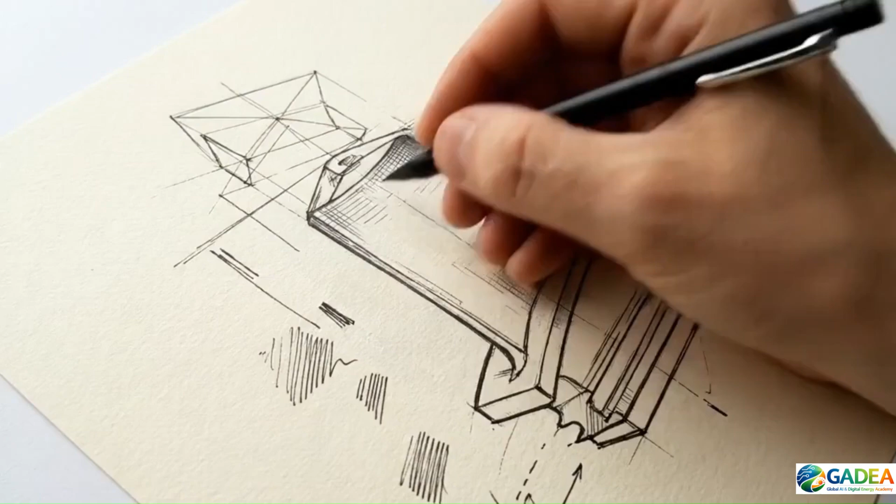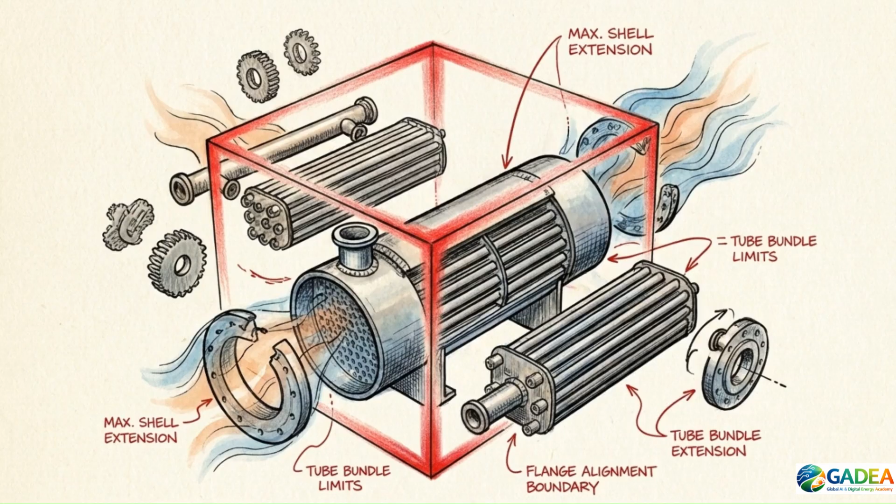Generating complex 3D geometry is no longer the hardest part of mechanical design. Today's tools make modeling almost effortless. The real friction in 2026 is ensuring that the geometry you just modeled actually complies with intersecting global regulations and surviving the multidisciplinary reviews required to prove it.

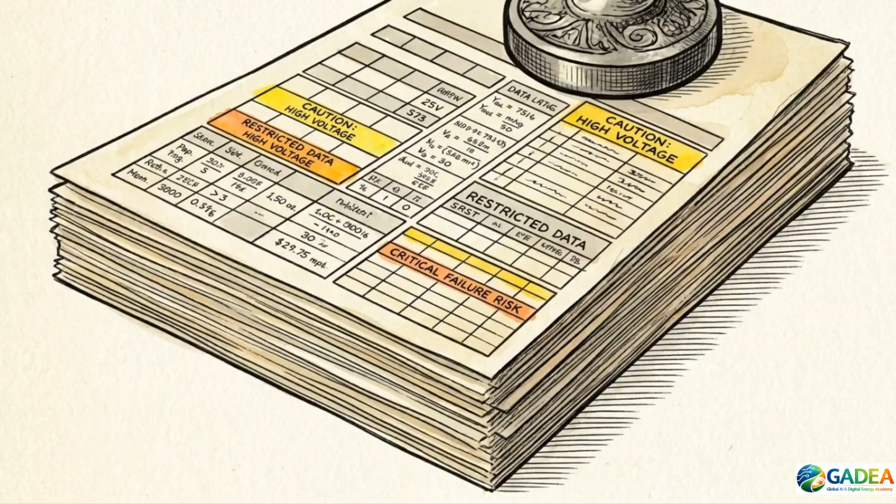For decades, the standard approach was to build parts in CAD and track the regulatory constraints separately in static spreadsheets. Looking at the flaw section, mapping codes with static documents leads to late-stage spatial clashes, when physical rework is most expensive. Modern PLM reconfigures this architecture.

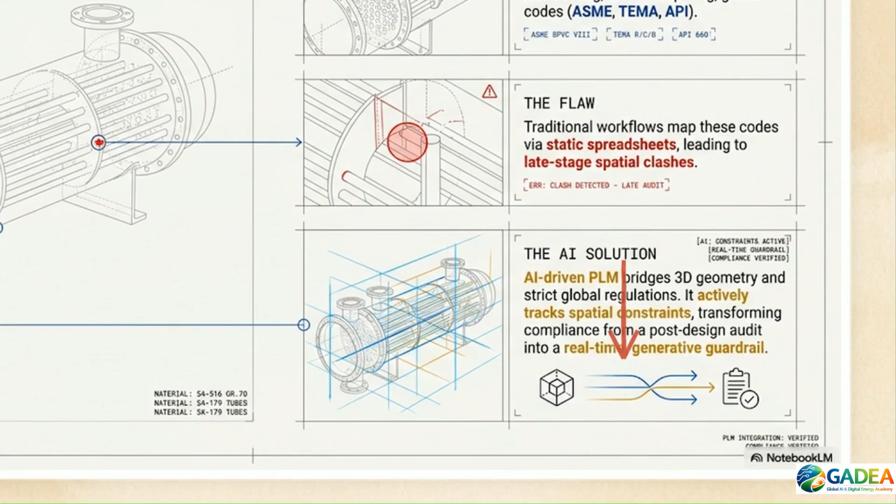By actively tracking spatial constraints, AI-driven PLMs convert a post-design audit into a generative guardrail. This leaves engineering teams with a crucial decision: do you pay the migration costs to adopt a heavy AI PLM, or do you piece together agile cloud tools and ultra-realistic renderers? Choosing a platform in 2026 requires a specific trade-off between rigid compliance guardrails and rapid iteration speed.

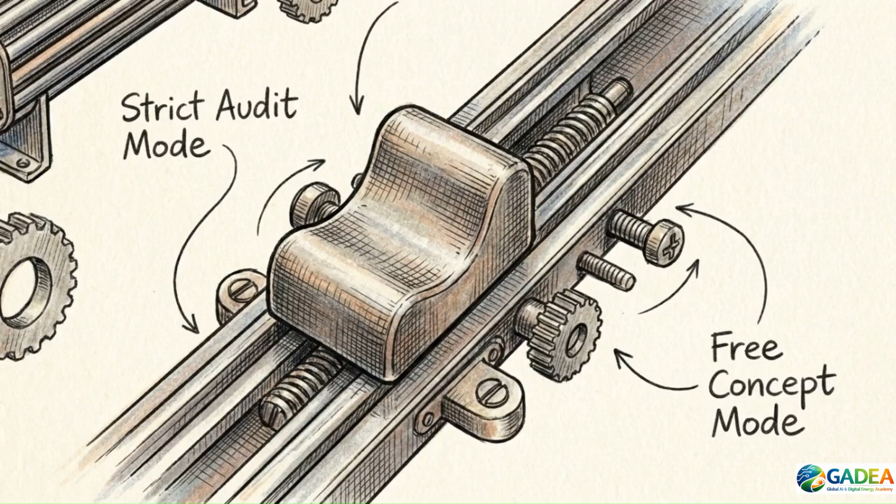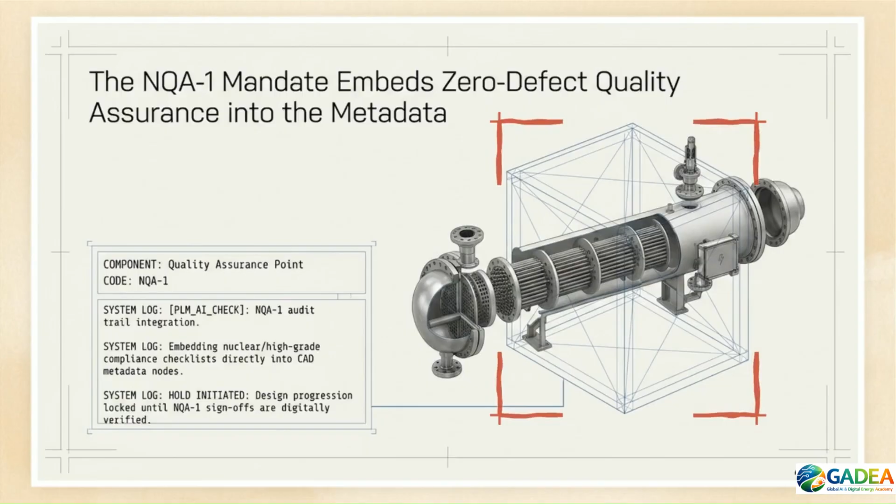Let's evaluate the Enterprise AI PLM tier first. This system serves as a generative guardrail for highly regulated fields. These systems handle specialized requirements by taking nuclear-grade checklists, like the NQA1 mandate shown in this bounding box, and embedding them into CAD metadata. Notice the hold initiated status. The system physically locks design progression until every NQA1 sign-off is digitally verified.

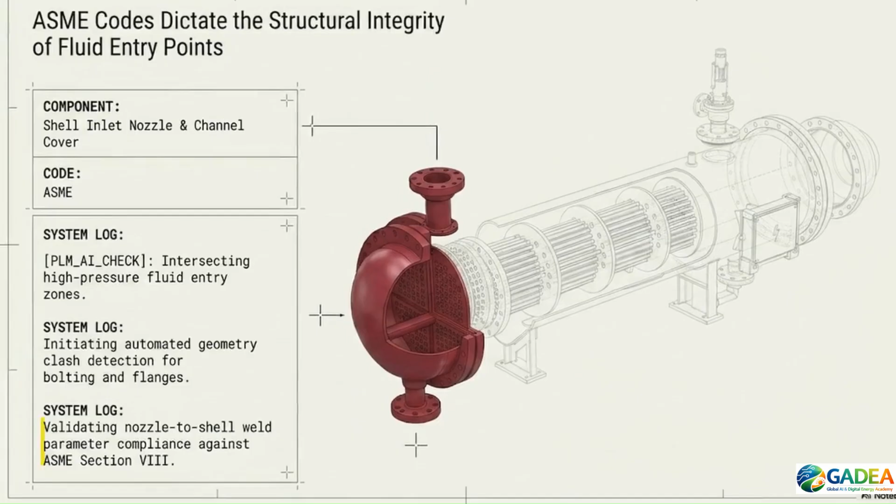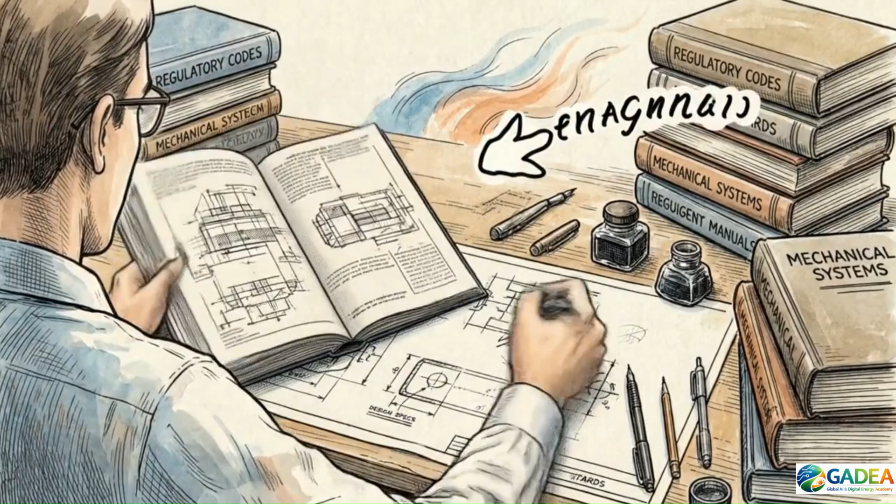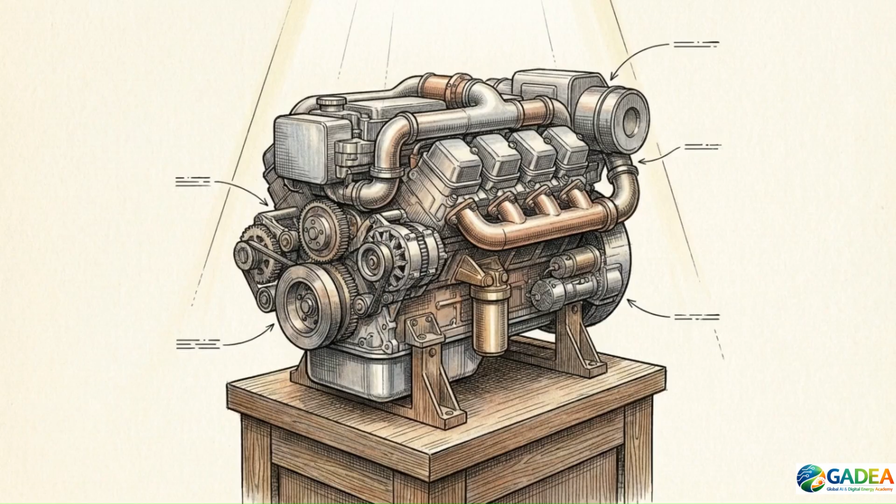Reaching this level of automation requires an upfront investment in metadata structuring and forces your team to adhere to a rigid workflow. Enterprise PLMs effectively eliminate late-stage physical rework. But if your team operates outside of heavy industrial design, the administrative overhead makes this system expensive overkill.

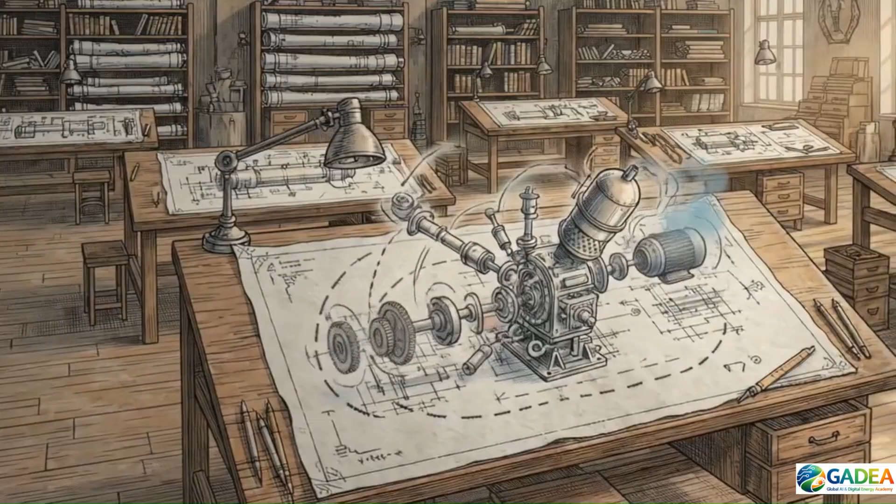If your priority is moving fast rather than locking down databases, you have to look at agile cloud platforms and desktop motion solvers. Desktop solvers approach complex assemblies by calculating real-time friction and fit tolerances during a virtual collapse, as seen in Step 2. Moving to Step 3, verifying these physical integrations digitally allows teams to resolve standard mechanical constraints without costly downstream physical testing.

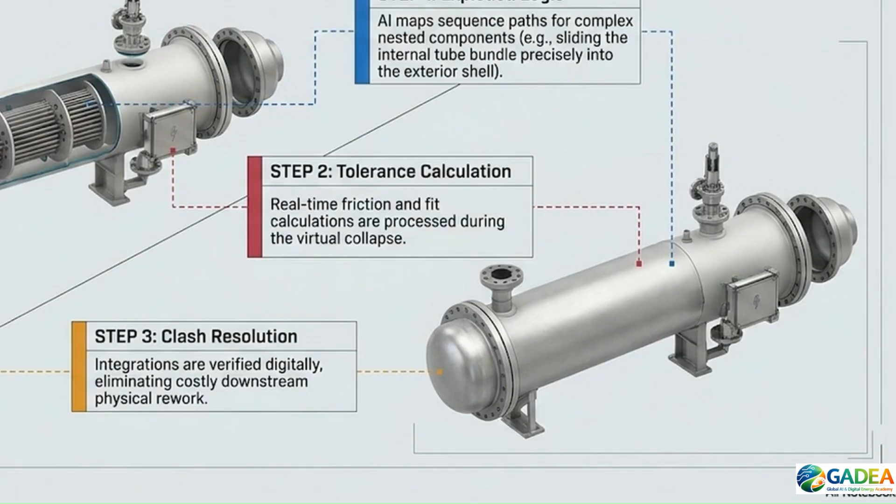When you move that core architecture entirely to the cloud, you unlock real-time, multi-user iteration. Distributed teams can conceptualize and edit simultaneously. However, agility has its limits.

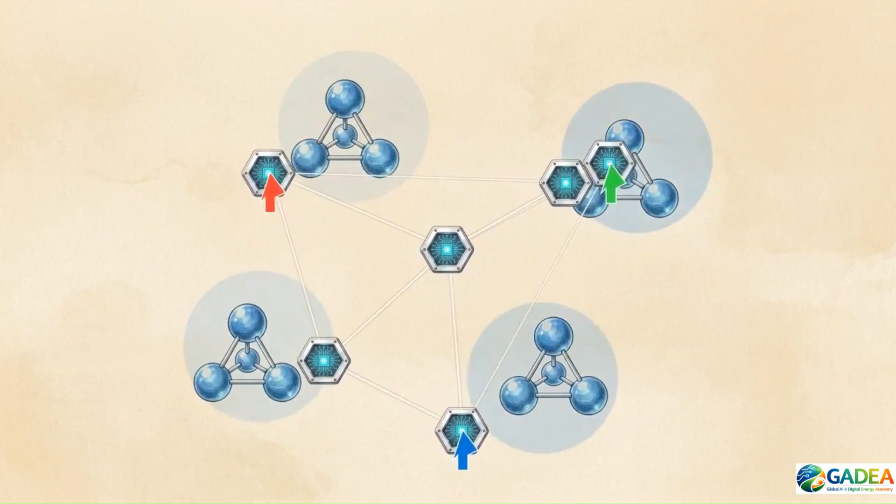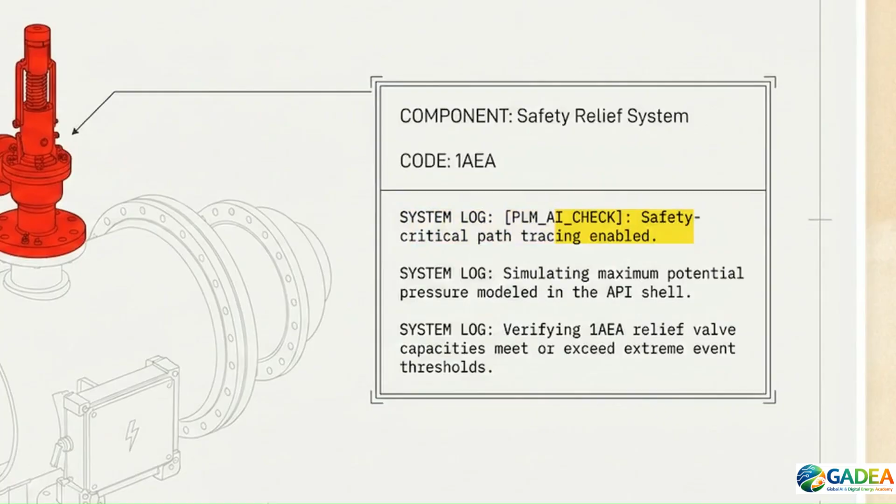Looking at this red safety relief valve, you can see an IAEA protocol log. Tracking safety-critical paths like this across separate, siloed tools often breaks your digital thread. Patching together cloud agility and localized desktop simulation provides iteration speed, but applying specialized standards across a disconnected stack introduces version control vulnerabilities.

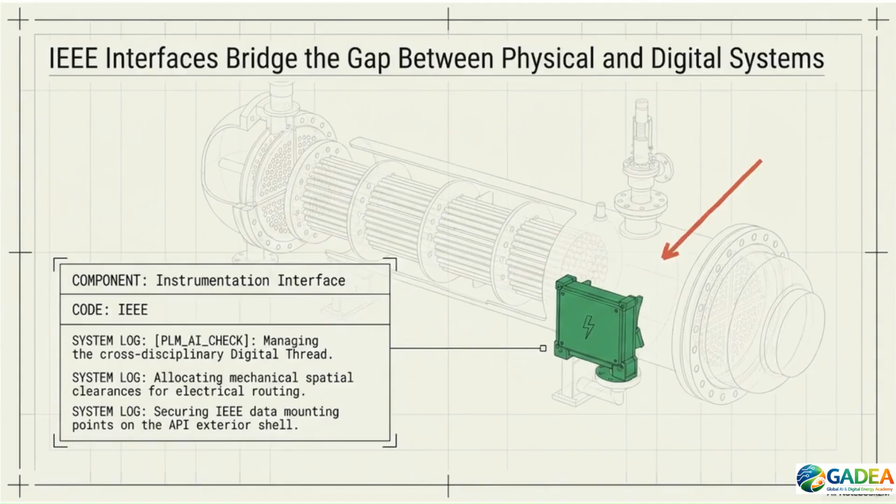The final layer to consider is visualization, exporting digital twins into AI-enhanced rendering engines utilizing techniques like 3D Gaussian splatting. These tools are effective for securing client buy-in. This green instrumentation interface and its corresponding IEEE system log shows how visual clarity helps bridge the communication gap across different disciplines.

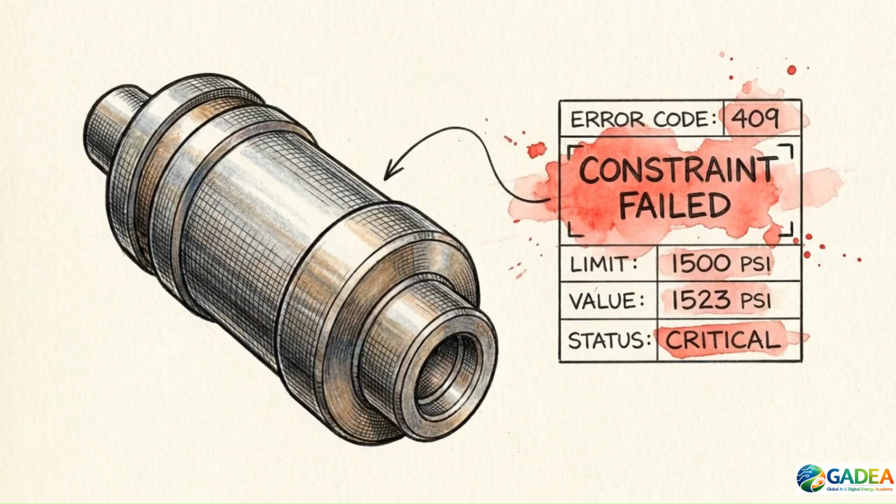The limitation is that these are strictly downstream applications. They clearly illustrate final compliance, but they do not mathematically enforce foundational limits while the engineer is modeling. This graphic demonstrates where the real work happens. The structural limits of this blue API pressure boundary require continuous automated tracking against flow simulations.

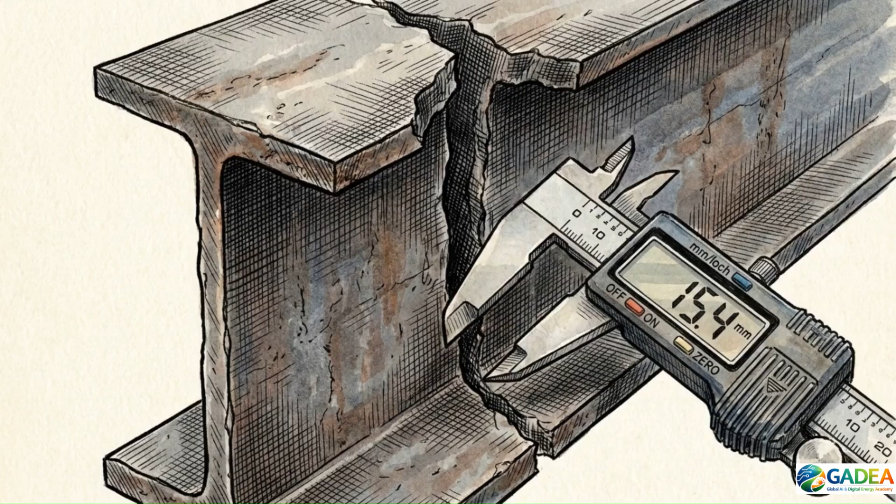That logic has to reside in your primary engineering tool. High-fidelity visualization is an essential tool for communication, but it is a cosmetic output, and it cannot substitute the structural rigor of active constraint modeling.

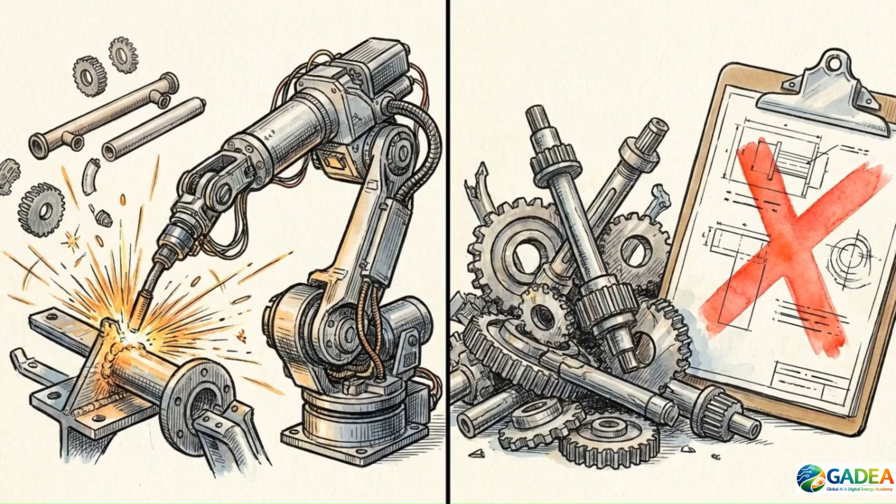There is no single perfect platform. The right stack is the one that aligns with your team's most expensive point of failure. This regulatory genealogy matrix lays out the reality of modern design. You are constantly balancing overlapping standard codes, primary variables, and validation triggers simultaneously.

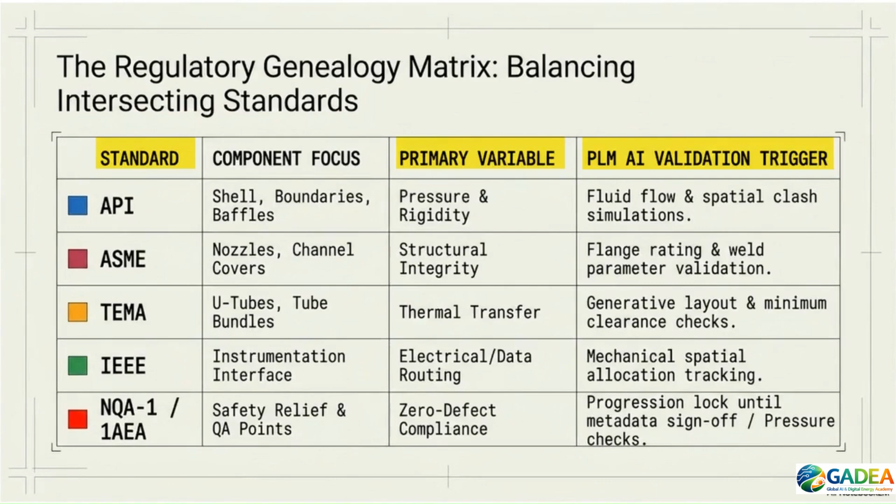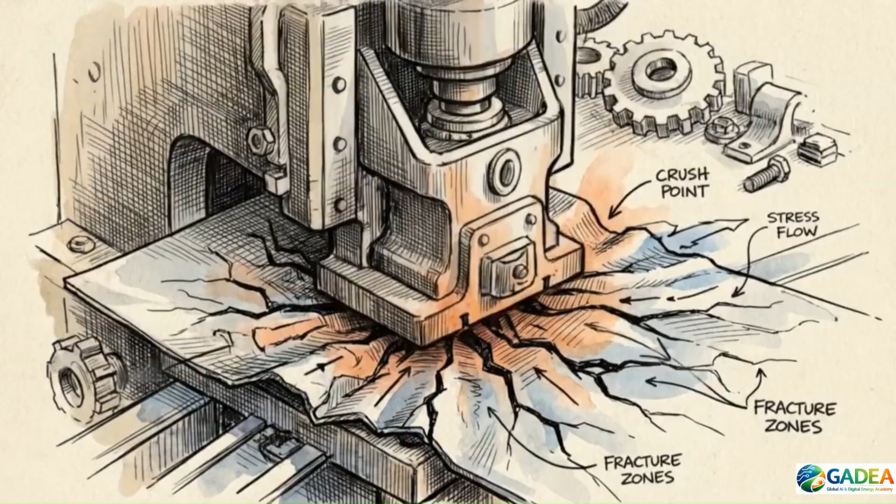If failing to balance those standards results in physical rework and manufacturing delays, your primary bottleneck is compliance. In that scenario, the recommendation is the Enterprise AI PLM. In this case, the capital expense is justified. The PLM AI core acts as a central conductor, tying all of these color-coded components into a single verified system before manufacturing begins.

Alternatively, if your main bottleneck is slow conceptual iteration and delayed client approvals across a distributed remote team, forcing them into a heavy PLM will stall your workflow. For that scenario, adopt a modular stack. Combine cloud collaboration tools for rapid modeling with ultra-realistic downstream rendering to accelerate sign-offs.

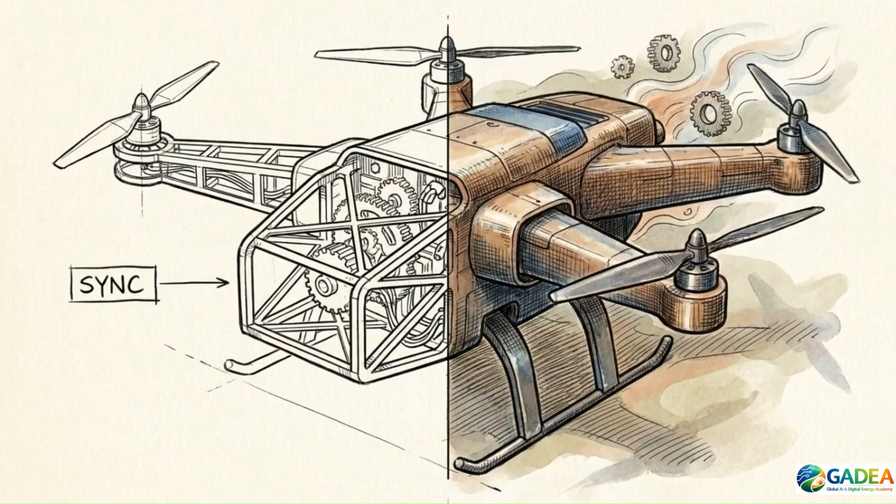Engineering managers should look past the AI marketing buzzwords. Identify the specific friction slowing down your daily workflow and invest strictly in the tools that resolve it.